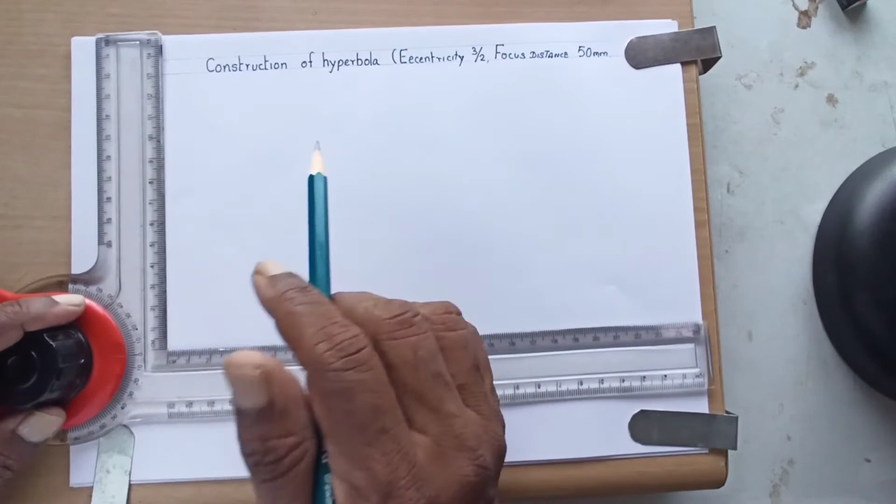Now, just like the construction of ellipse, here also we are going to follow the same method, except that the vertex point has to be carefully marked. In the case of ellipse, it was 2 by 3. So from the focus we have to take minimum distance, and from the directrix it will be a larger distance. Whereas here, in the case of hyperbola, from the focus there will be a larger distance, and then from the directrix it is a minimum distance.

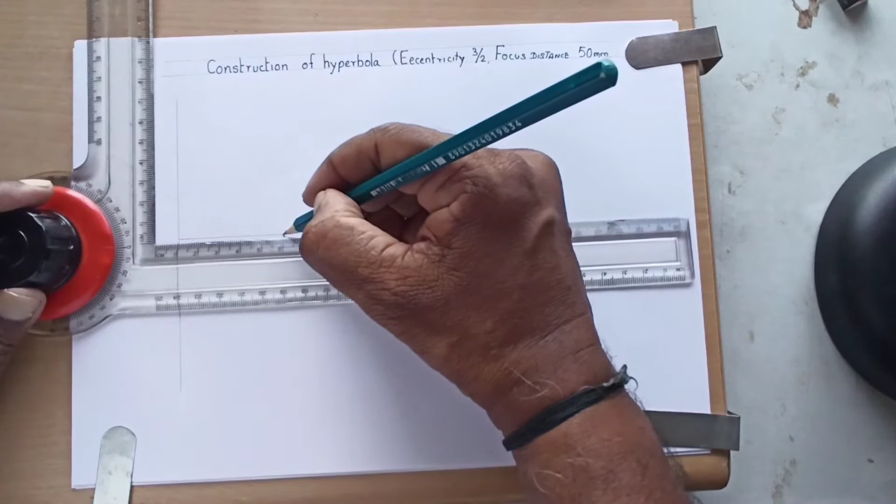Now let us see the directrix. We have drawn the directrix now, and then here we can draw the axis of the hyperbola. Here as usual we can mark 50 mm to locate the focus. This is focus. This dimension is 50 mm. Here it is just marked like this. It is 50 mm.

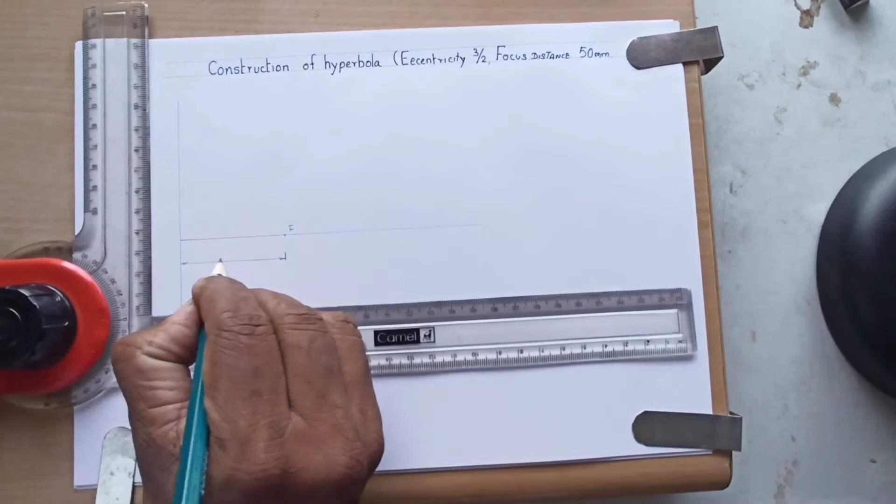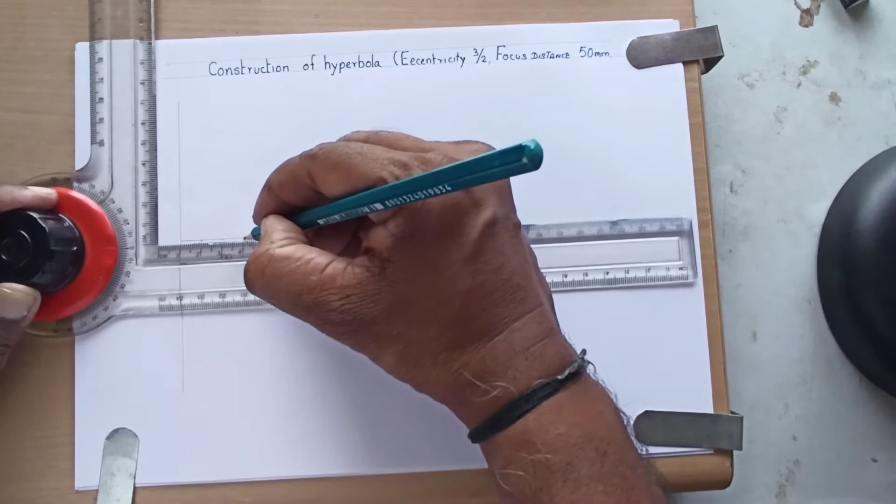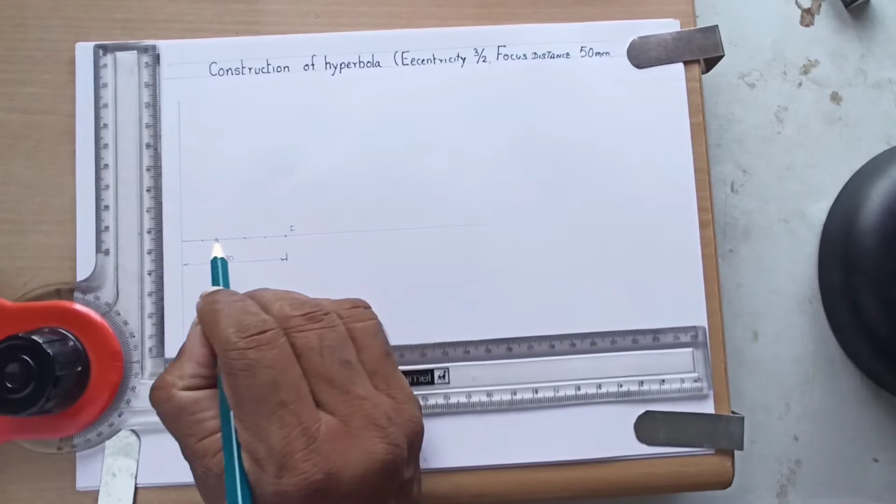Now here we have to divide this focus distance into 5 equal parts, because the eccentricity is given as 3 by 2. The sum is 5. In the case of ellipse, you have marked the vertex point here. There was 2 times of the distance here and 3 times was here. Now we have to mark the vertex point here. That means here 3 times of the distance from the focus and 2 times of the distance from the directrix.

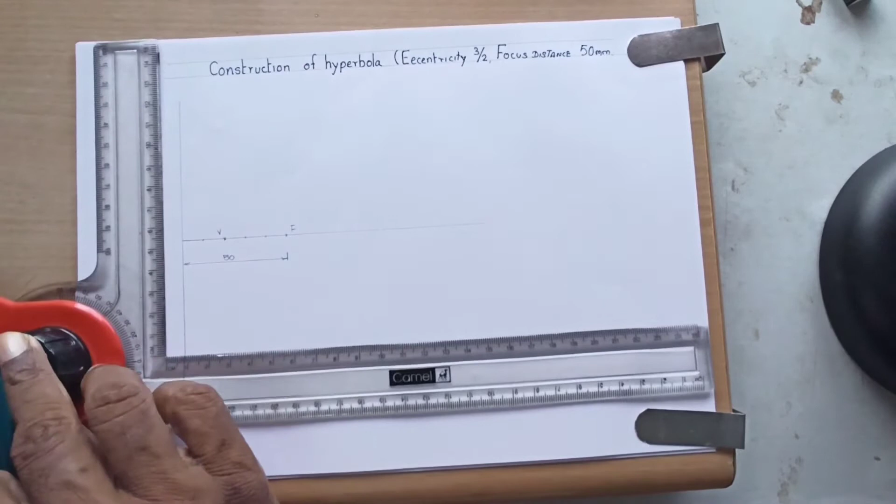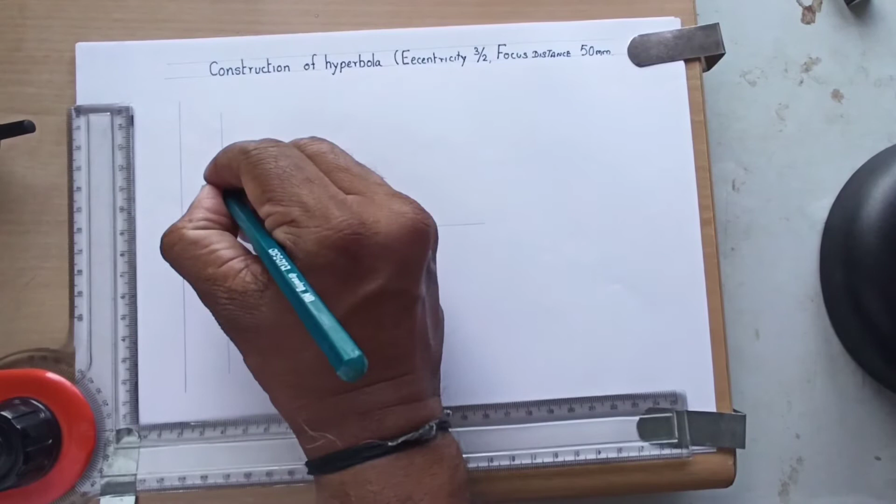Now as usual, we can draw a vertical line through the vertex and then transfer this VF distance, just like the same similar principle of your ellipse method. Just transfer this distance now. You say this point is C and this point is E. Now we have to join this C and E and extend this.

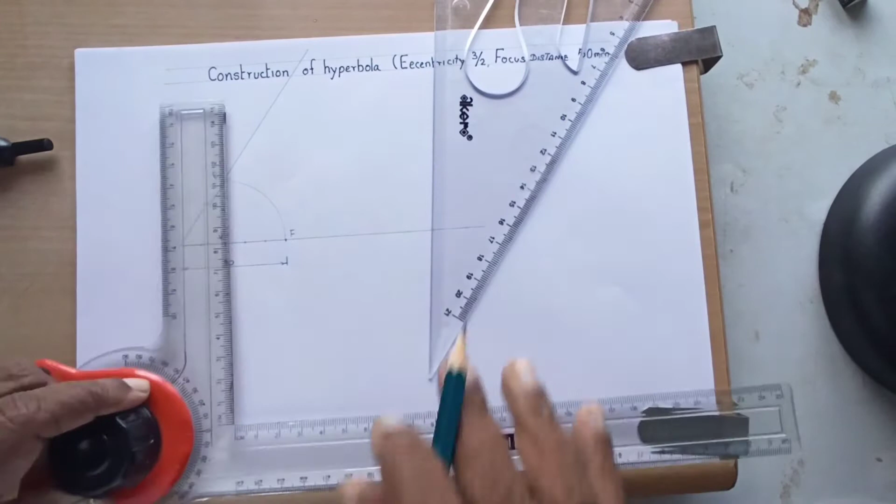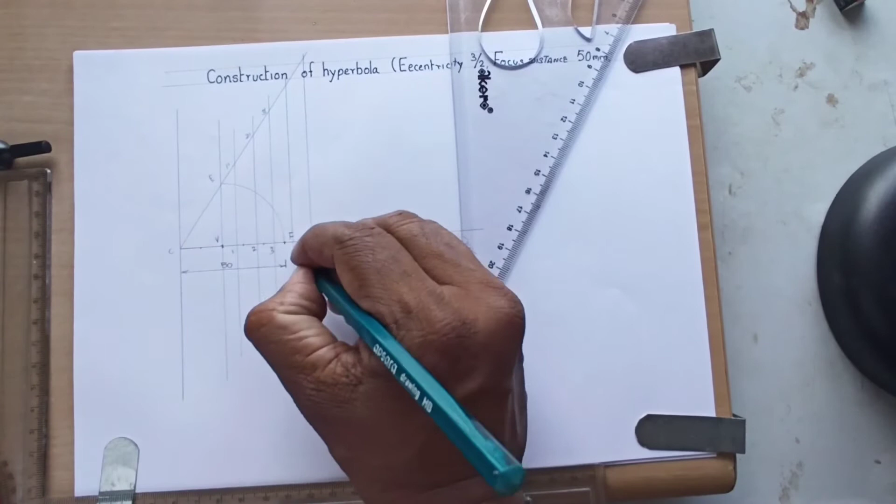We can extend this. Here also, just like ellipse, we can draw any number of lines that need not be of equal distance. Now let us name this point as 1 and 1 dash, 2, 2 dash, 3, 3 dash, 4, 4 dash, 5 and 5 dash.

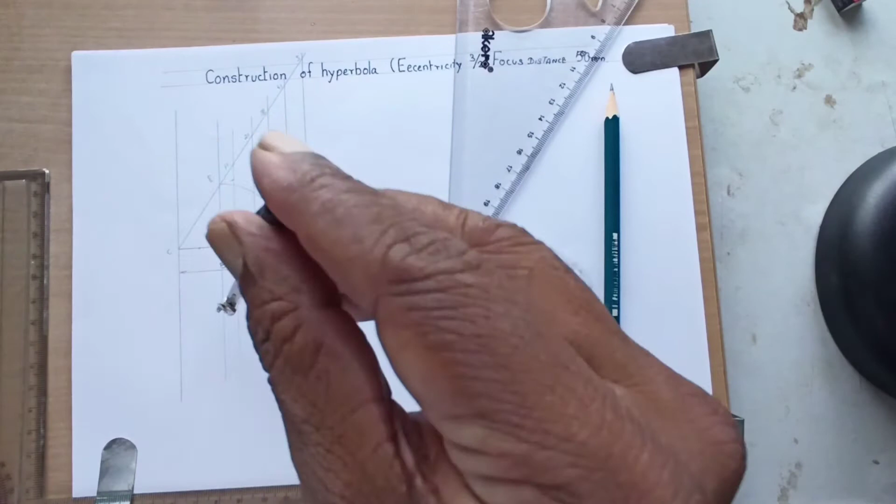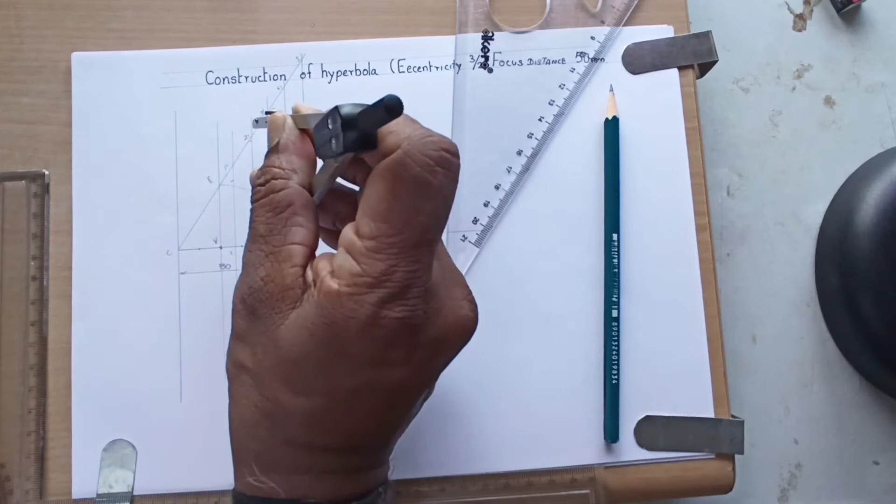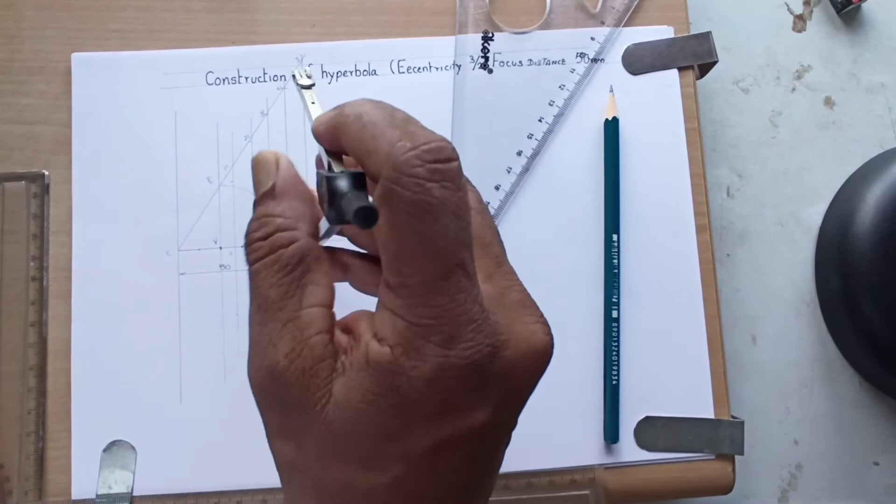Now, just like the same ellipse method, you can take the radius of 1 dash distance, and from F you can draw one arc on the line 1 dash on both the sides. Similarly, we can take 2 dash. From F we can draw 2 arcs. Similarly, from 3 dash, from F we can mark the points here. Similarly, 4 dash, from F we can mark here as well as here, and 5 dash you can mark from the radius and take the center as your F.

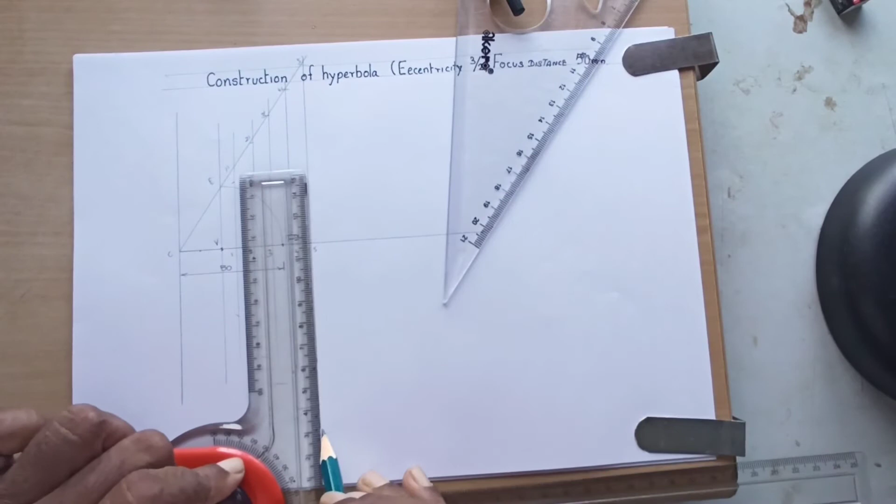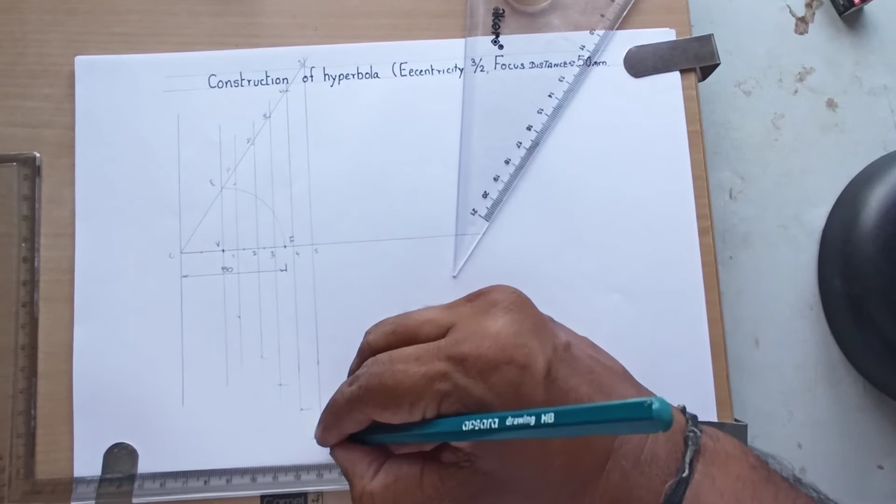Now I have to extend these lines to get the cutting points. Now the points on the hyperbola are just obtained like this. This point, this point and this point. We can join these points by a smooth curve. This will not coincide, just like ellipse, this will not coincide. We can take few points and then we can leave. That will be your hyperbola.

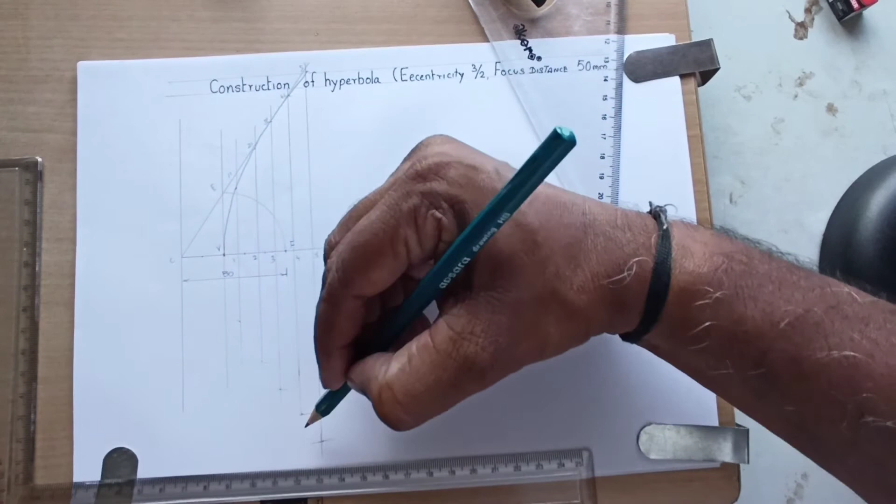Now the curve has to be joined smoothly. Now here also we can just join this curve. So this is going to be your hyperbola. For this also, drawing tangent and normal will be the same method.

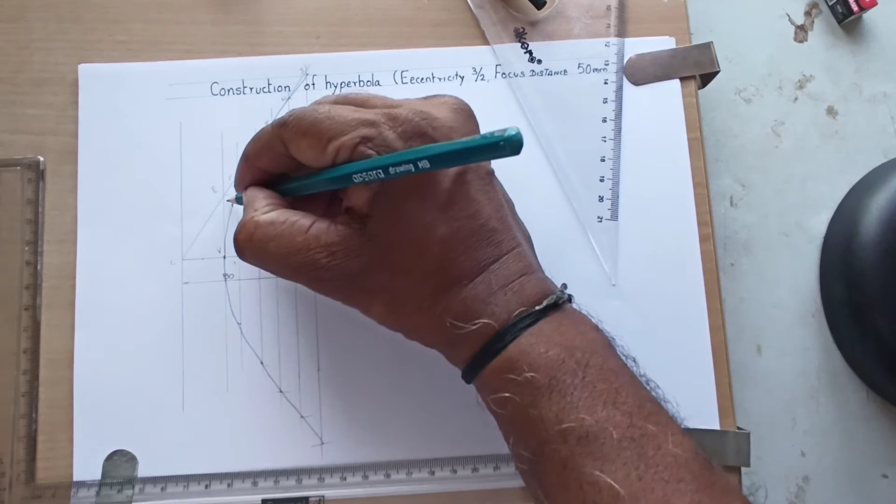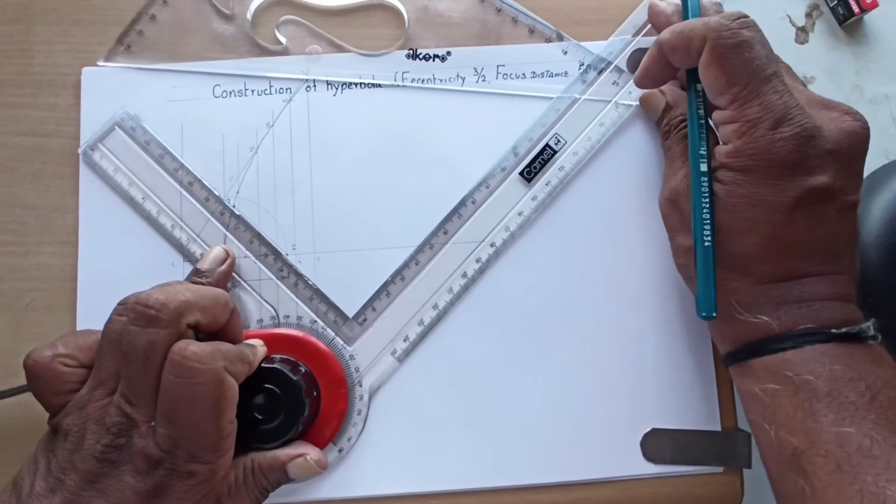If you consider this is the point P through which you want to draw a tangent and normal, now we can join this P and F by a straight line. For this line, I want to draw a 90-degree line from F. So the procedure is very simple. We can make the mini drafter one limb parallel to this line, and then we can tighten this knob. Now this mini drafter is set to 90 degrees. The other limb is 90 degrees.

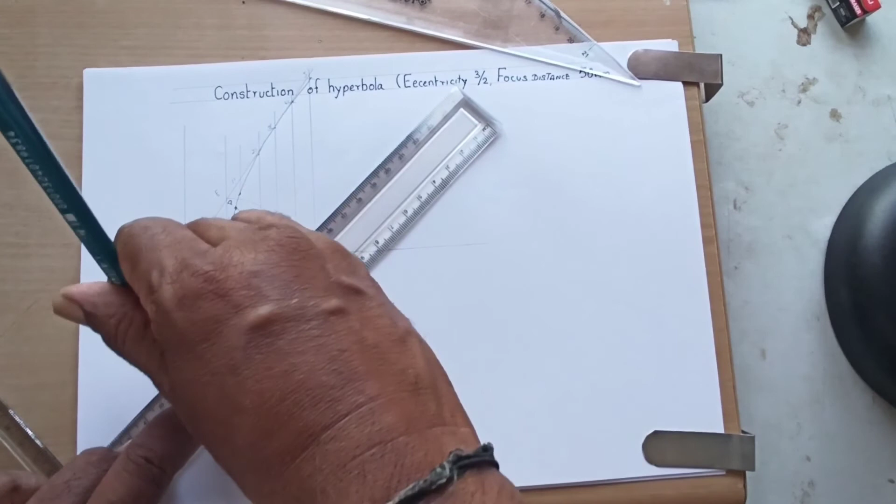So using this other limb coinciding with F, we can just draw one line which cuts your directrix at this point. We say G. So G and P can just join and extend it. That is going to be your tangent.

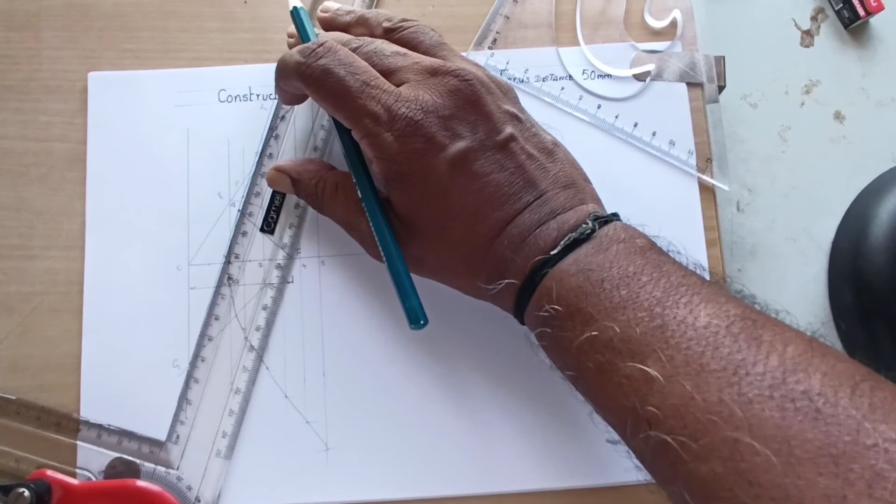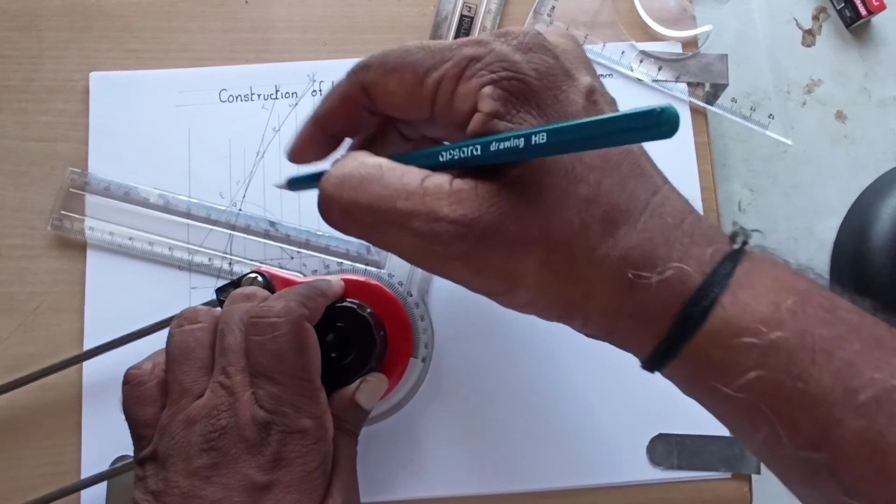This is your tangent, and then if you want to draw the normal, you make the mini drafter limb parallel to this tangent line and tighten this knob, then bring the other limb against your P and then draw a line which is your normal. This is the procedure of constructing your tangent as well as normal for this curve.